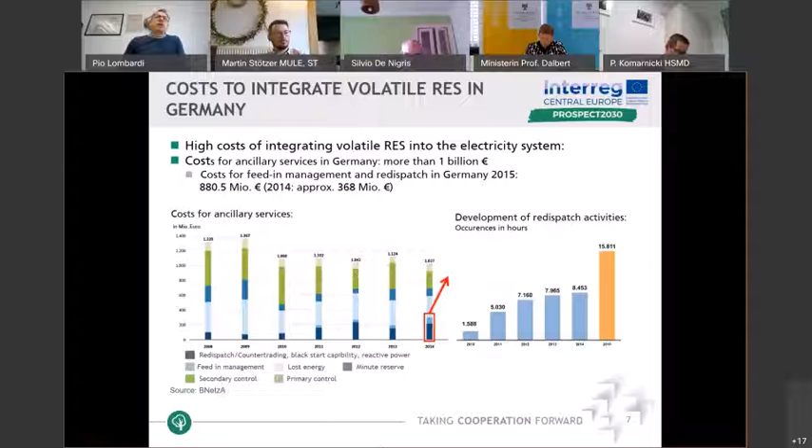So when we talk about renewables, we also have to talk about the costs of renewables. Not only the cost of generating electricity, which decreased in the last years because the materials are better and the efficiency of the system is better, but also the cost that the system operator has for integrating the volatility of wind or solar generation.

You see that in Germany, the costs for ancillary services were high at the beginning, in 2009 or 2010, and in the last years they decreased. At the same time, the redispatch activities increased. It means that introducing renewables requires more flexibility in the system. We need the volatility of wind and photovoltaic to be compensated with some kind of flexibility.

The scientific community has been investigating this problem for at least 15 years. What should we do for decarbonizing the system? If you look at the answers the scientific community gives, they address three main topics. We may need active consumers, we need energy storage systems, and we need multi-energy systems. In my point of view, we need all of these at the same time: active consumers, energy storage systems and multi-energy systems.

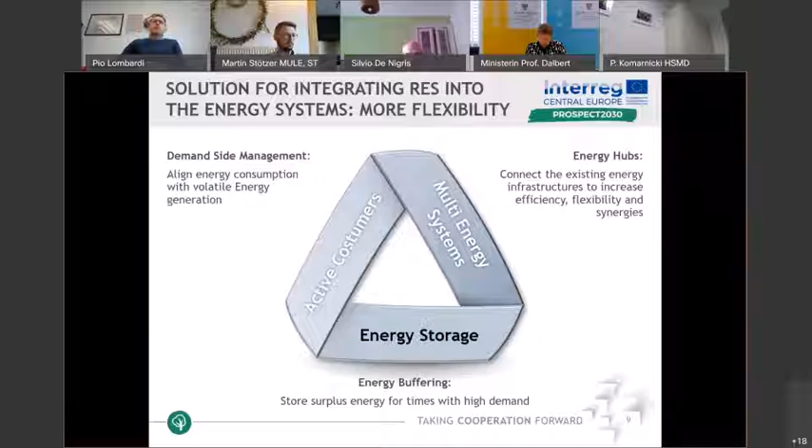What does active consumer mean? Mostly, if we talk about active consumers, we talk about demand-side management programs, which focus on industrial consumers. Even if small, residential consumers may be also involved, most of the load is consumed by industrial consumers.

Or if they are more efficient, if they use some more efficient technology, they may also offer the possibility to consume less for producing the same amount of product, as well as, if they have the possibility to modulate the production, they can also increase the consumption, meaning the production, and therefore make what is called strategic growth.

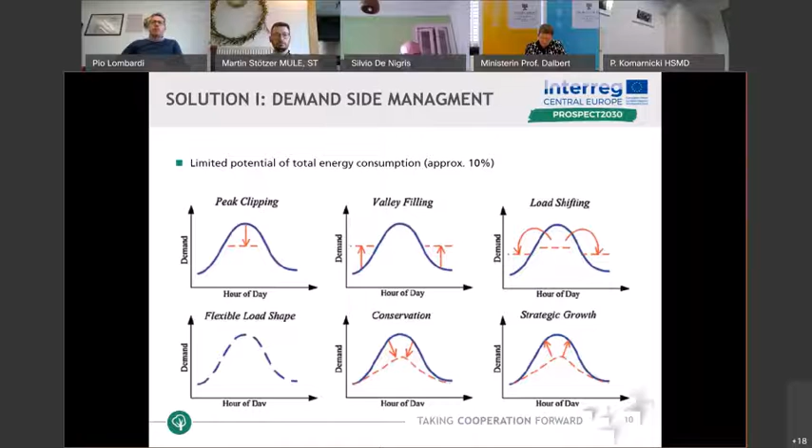So these programs are typical for industrial consumers, and may be used for making the industrial consumer an active consumer. Besides that, we also have the possibility to integrate energy storage systems into the network. Which kind of energy storage system? Most of you know batteries, but the contribution that batteries are giving now is very limited.

At the moment in Europe, we have mostly pumped hydro storage systems, which were installed 40, 50 years ago in the Alps regions. We cannot imagine increasing the contribution of pumped hydro in Europe because the acceptance of the population is very low, and also because they are geographically limited. So we don't have a place where we can think to install or increase the capacity of pumped hydro. Another storage system which may contribute to storing high amounts of renewables is the compressed air storage system.

So in Germany, we have one of the oldest compressed air storage systems, which is diabatic, which means it is a hybrid storage system because it burns natural gas. Anyway, here near Magdeburg, for several years, an adiabatic compressed air storage system has been in planning, which means that it will not burn any fossil sources. It will store the electricity not only in the form of compressed air, but also in the form of heat. And storing these two forms of energy, it will be possible to store high amounts of renewables.

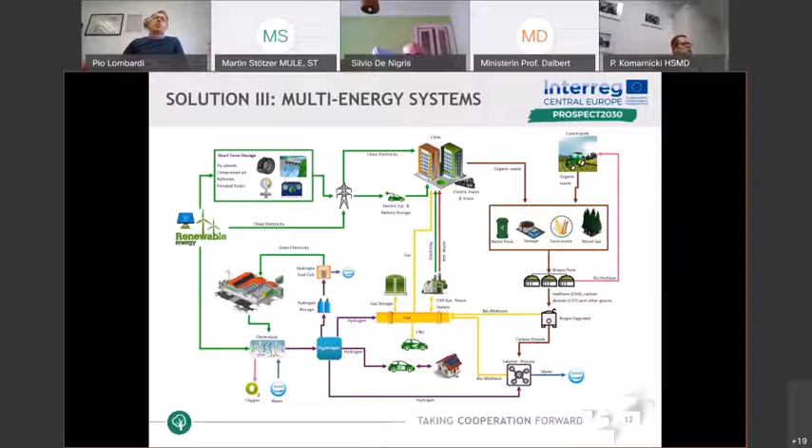So coming back to the methodology. The methodology used for planning systems should be a holistic methodology, which means we have not only to consider an economic criterion, or only ecological criteria, but we have to consider many criteria. One holistic approach is the analytic hierarchy process, in which we have a hierarchical structure.

We need to set a goal, and we need to define criteria. We should also define sub-criteria, and we have to identify the solutions. I will show you an example at the end so that this methodology is clear to understand.

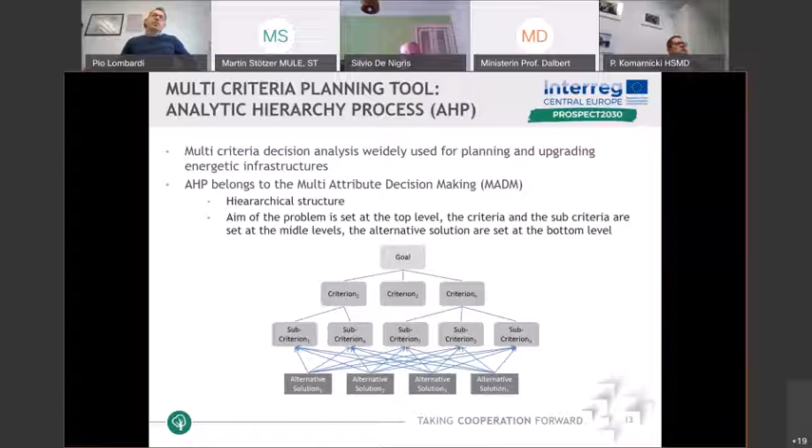So some theoretical information. As I said, we need to set a goal. We need to put the problem in the form of a hierarchical structure. We need experts who evaluate the criteria and the sub-criteria through pairwise evaluation. Using the opinion of the experts, we make a matrix which is called the judgment matrix. From this matrix, we calculate the eigenvalue and eigenvector.

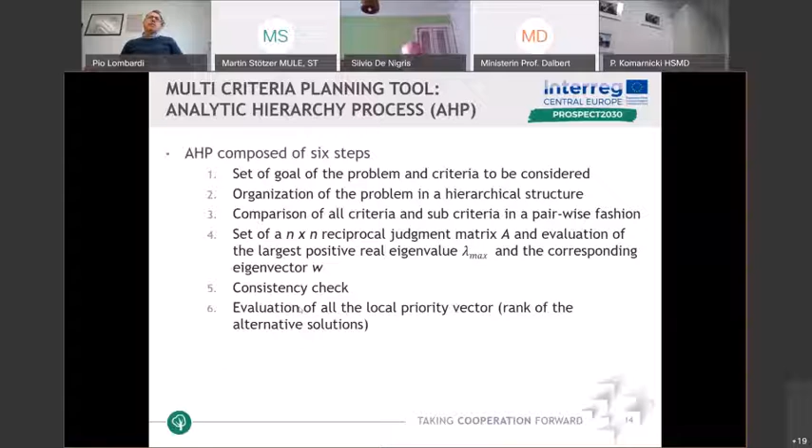I will not go deeper. I will show you the example later so that you can understand. We can check if the experts have done a consistent evaluation of the criteria, and once the check is positive, we can identify the best solution.

So, in order to evaluate the criteria, Professor Saaty, who developed this methodology, has done a matrix like this one, a table like this one, in which you have to rate the criteria; you have to give a score from 1 to 9 when you compare two criteria. So supposing that I have ecological criteria and economic criteria, if the ecological criteria compared with the economic criteria receive 9, it means that the ecological criteria is extremely important. If it receives 1, it means that it's equally important.

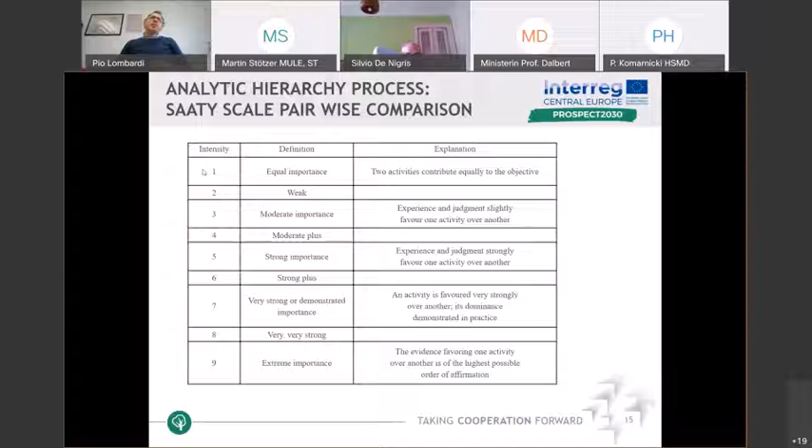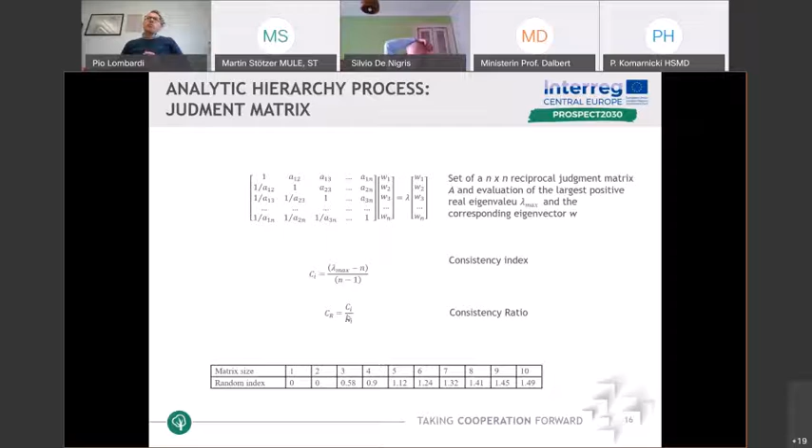So once you have done this matrix, it will be something like this one, you check if the evaluation of the criteria is consistent, and you check using the consistency index and the consistency ratio. It means that if we have an error not larger than 10%, then we can say that the experts have evaluated the criteria in a consistent way. Now, this is theoretical; I will show you an example because it may be easier for you to understand it.

This is a study that we have done in Russia, in Siberia. We wanted to plan an isolated power system. I will explain why. And we have used 3 criteria: economic criteria, ecological criteria, and social criteria. From the economic criteria, we have considered investment cost, how much it costs to do that, and how much it will cost to produce electricity. From the ecological criteria, we have considered 3 sub-criteria: the amount of CO2 that the technology emits, the amount of NOx, and the particulate matter.

On the social criteria, we have considered the opportunity that a solution offers in terms of job creation. We have identified 4 configurations of the system. The configurations are here. In the first configuration, we supply electricity only using a diesel generator. The second, diesel and photovoltaic. The third, diesel, photovoltaic and battery. And the fourth, diesel, photovoltaic, battery, and wind energy. So these are the main criteria. We have to choose which is the best one, considering all these criteria listed in this diagram.

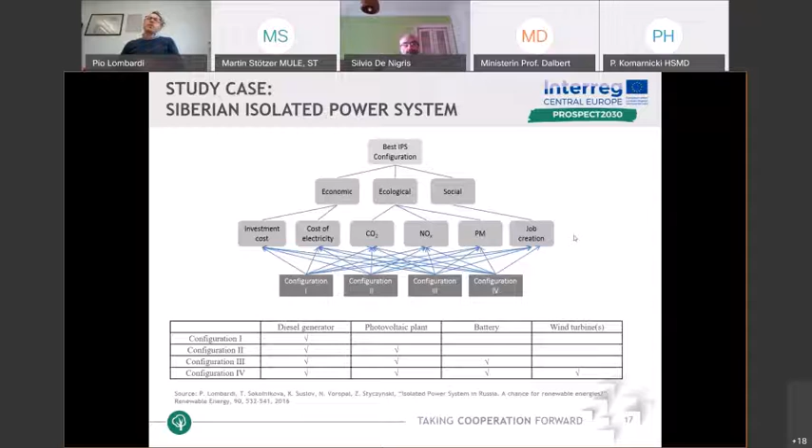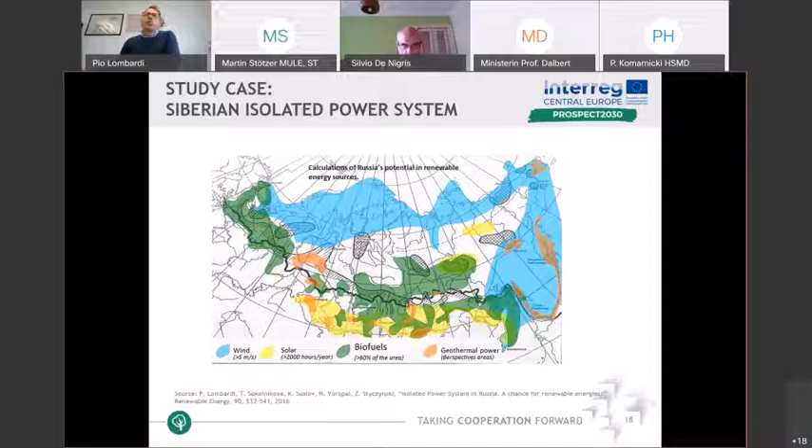So in order to understand why we have investigated that, this depicts Russia. The main grid in Russia is the black line here. There are many regions which are not connected with the grid, and they produce electricity using a diesel generator, and many times the diesel comes by helicopter, since these are very remote zones, or by boats. And therefore, in these regions, it may be very interesting to use renewables, since the potential of renewables in Siberia is very high. They have a lot of wind, a lot of sun sometimes, Baikal, for example, and there's a lot of biofuel, and the potential of geothermal energy is large.

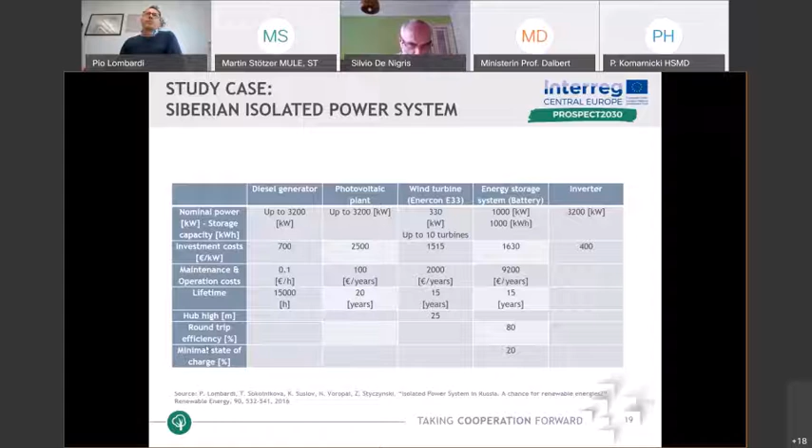So, the assumptions that we have considered. We have considered a diesel generator with such capacity, photovoltaic, wind turbine, energy storage system, in this case a battery, as well as an inverter. So you see the technical capacity, the investment cost, the maintenance cost, the lifetime, the efficiency and so on. You see that depending on how much the diesel costs, of course, you have different electricity costs. And we have evaluated all the electricity costs that we may have depending on the diesel price.

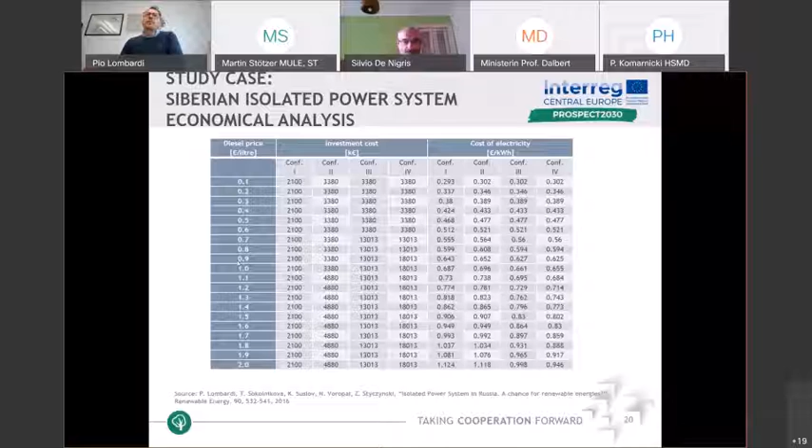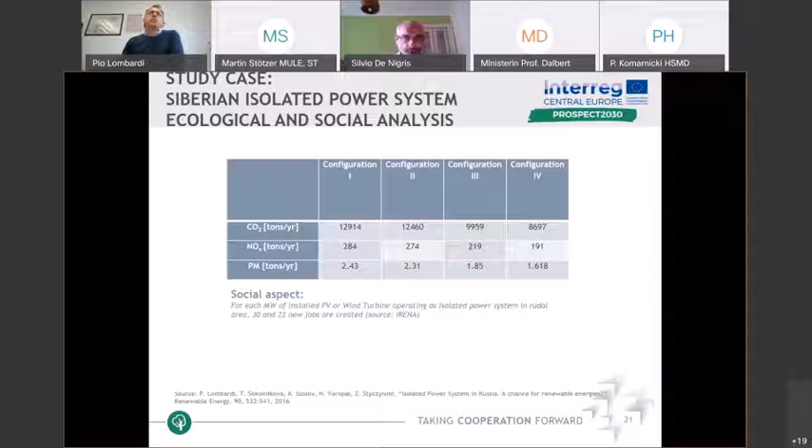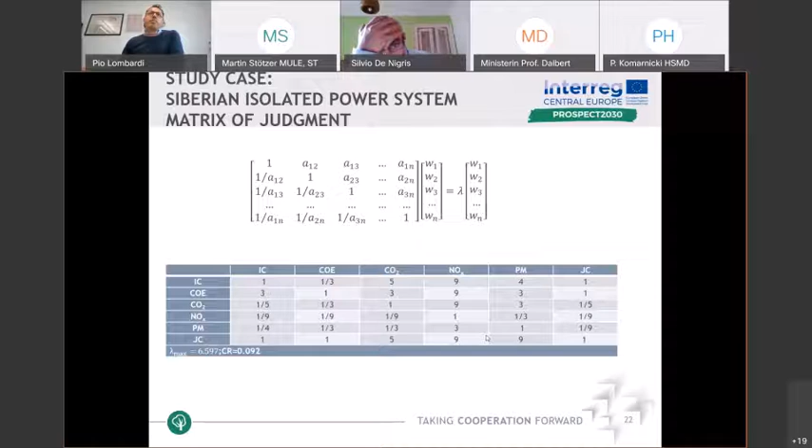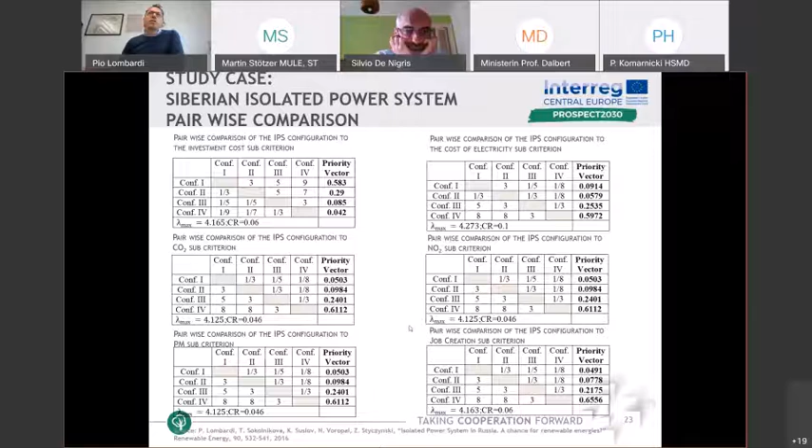So this matrix can be done also comparing the different configurations of the system that we have evaluated, depending on the criteria: investment, cost of electricity, CO2, NOx, particulate matter, and job creation. So you compare the systems according to all the criteria, and at the end you have the results. The results say that with 48%, configuration number 4, which means diesel, photovoltaic, battery, and wind, is the best one in this situation. It's the most appropriate one. Configuration number 3 has received 20%. Configuration number 1, 17%, and then the last one, just diesel and photovoltaic, is the last which should be chosen. So using such a methodology, you can plan the best solution for that system.

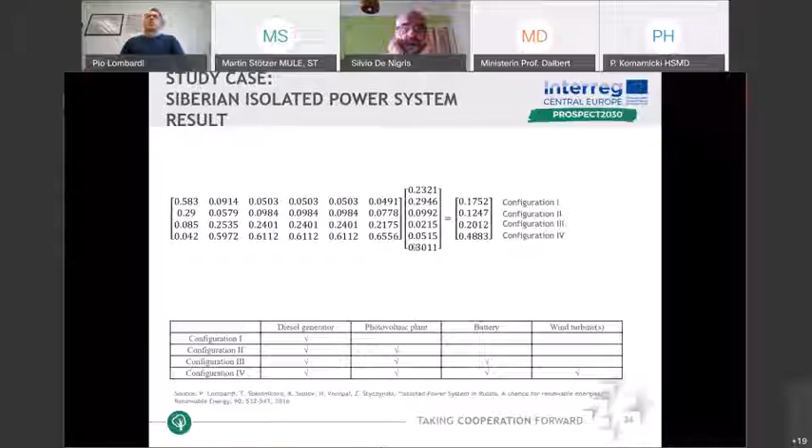And this methodology may be applied also for choosing if it's better to use wind farms or bio or photovoltaic. So it depends also on the problem that you have to consider. So I think I have done.